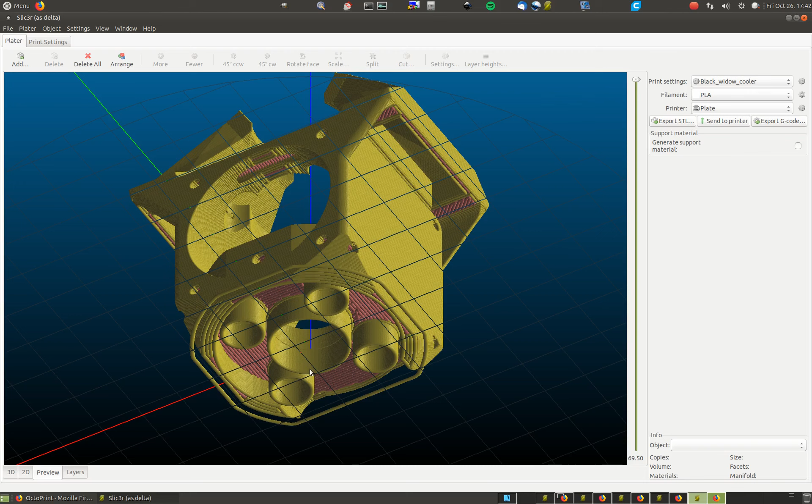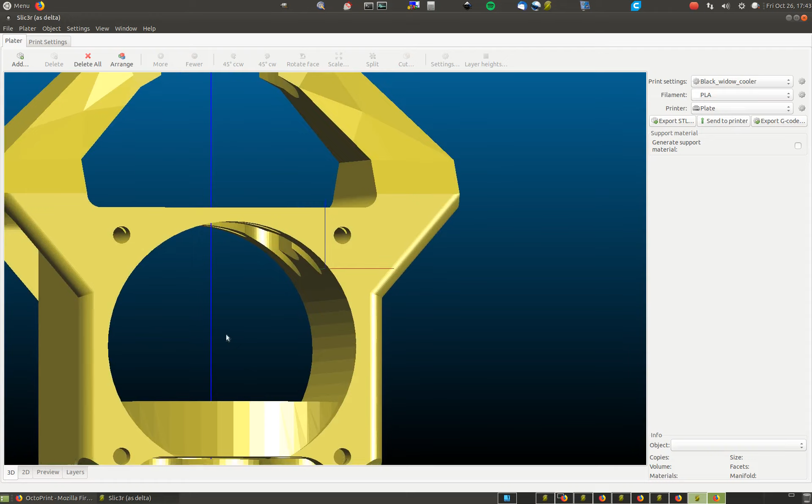I'll just go back to the 3D view. I've actually, in the design, put these supports. Now if I get the right angle here, we might be able to see the gap. There's a tiny little bit of a gap in this neighbourhood here. Maybe you can pick that up. It's pretty hard to show.

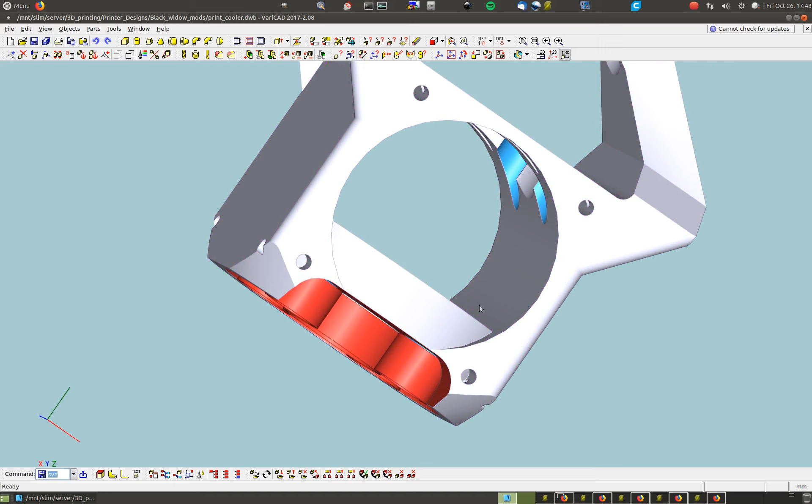Okay, I'll go to the 3D CAD program. There we go. So what I got here is there's a tiny gap, see a bit of blue space. Let's just see how much I can zoom in there. There you go, you can see that bit of space in this area here. That's 0.2 of a millimetre gap I've left there.

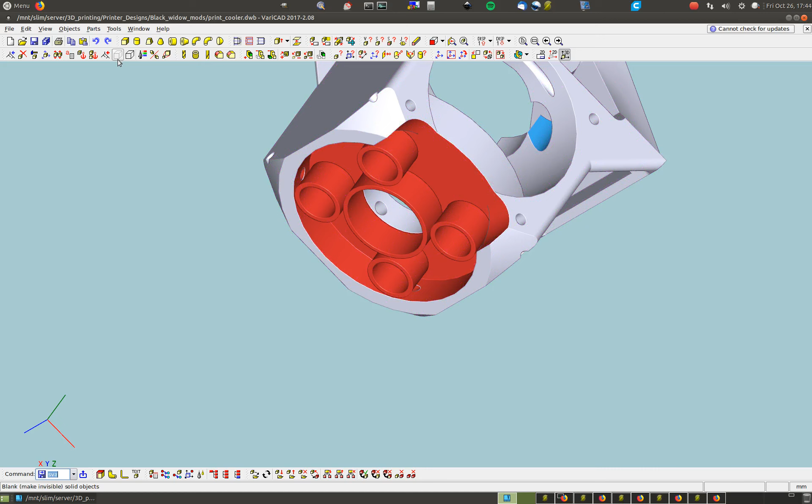Now I've decided to put the supports that I want into the design. The advantage of putting them into the design is if at a later date, six months later, you go to print this again, you won't forget the supports because they're built into the design. So you can come back, do the slicing, whatever, and there's a good chance you won't have any failures because of some silly thing you forgot. The supports are built in. I'll just make these invisible, make them disappear. So here's actually the design.

And you can see when we go to slice, there'd be an area. Change that view mode, it's rendering. There we go. When we go to slice, what the slicing packages do is create a couple of perimeter paths depending on your specifications. But I want 2 perimeters on this. I've got a 0.6mm tip doing the print, so it's able to do a pretty wide track.

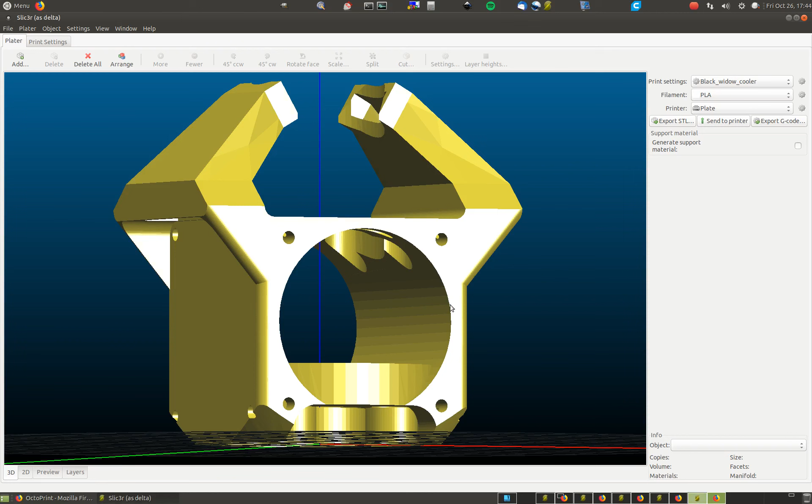And that's why I need the support to support basically 2 tracks, because it will do the track that's away from the surface, and then the fine surface track. So let's have a look at the slicer again so you can see what I'm talking about. Go back to the... okay, lift it up. Where are we? There we go.

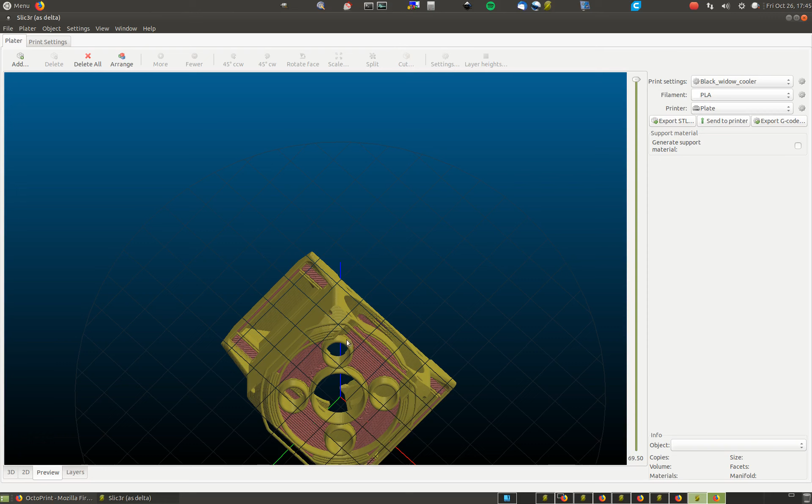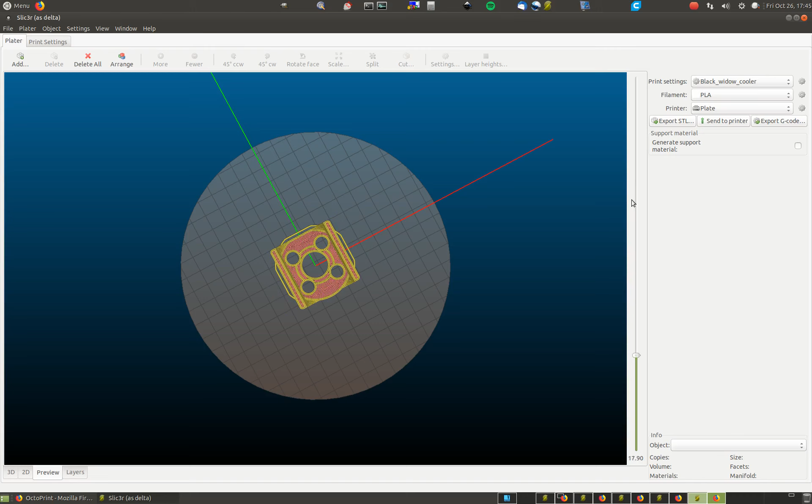So you can see there's the supports underneath, and there's actually another track that's partially supported. Maybe I'll look at it from above. Oops, other way - my CAD program and slicer zoom and pan the opposite way around, so my brain's always having to switch into reverse. So we just go down pretty low. Okay, so there's... you see the supports, I'll just zoom in. So there's our supports, done as very wide tracks.

And there's our first layer. You can see you've got 2 tracks here which land either edge of my support, and there's a 0.2mm clearance. So what you have is that should be partially supported but not really that well stuck. So these supports that I've designed should break away quite nicely.

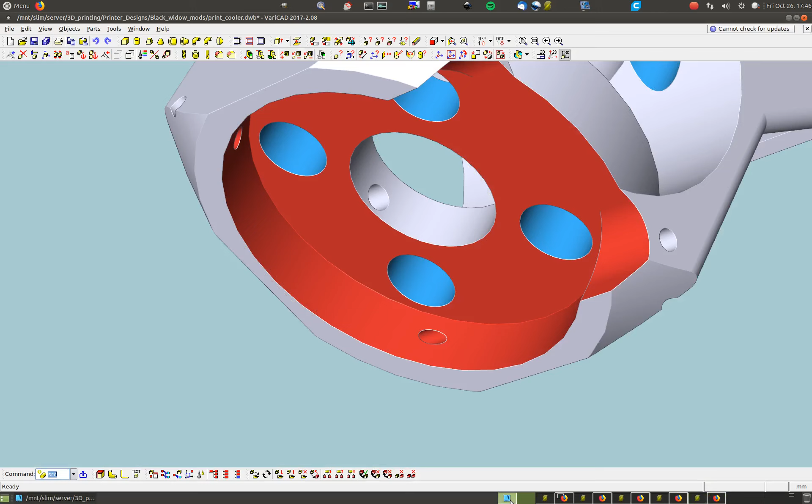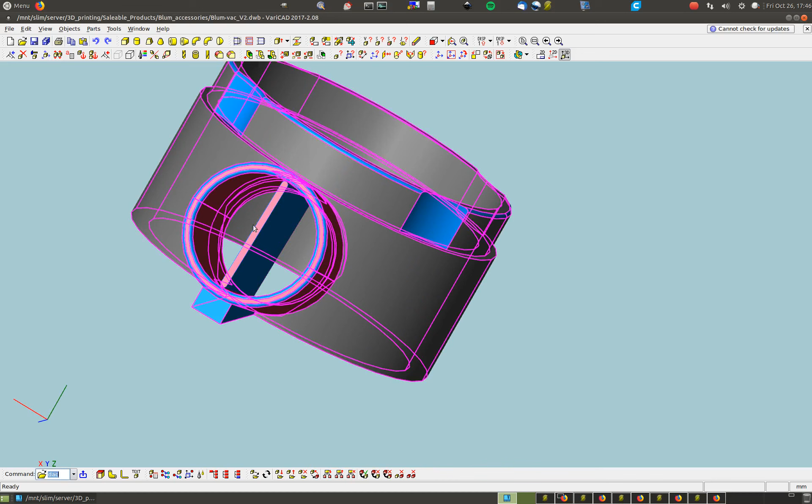I've done that on another design. Let me just... what's the best way of looking at that? Okay, I'll go into VariCAD, open Blum-vac, that should do it. Okay, so here's a built-in support as well, this rectangular piece. Again, I'll just get rid of the editing rendering. Go away. Now you can see there, if I zoom in close enough, there's actually that 0.2 of a millimeter clearance, and the same above.

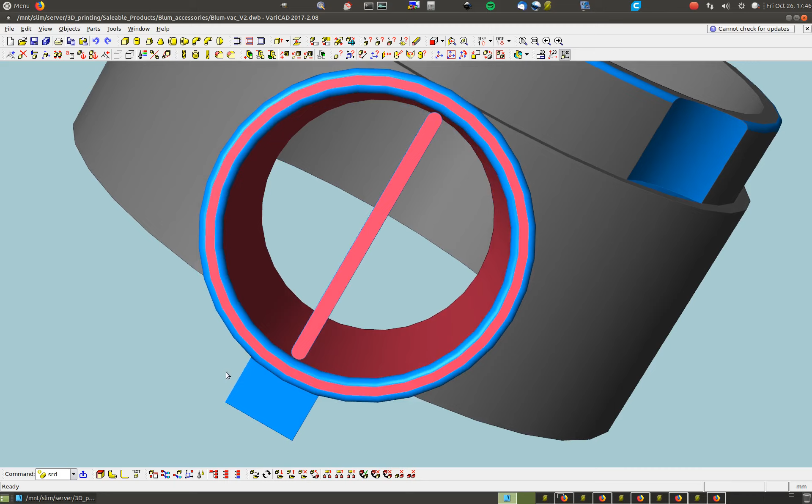So that's adequate for me to have a breakout support in that section. If I let the slicing packages do that, they end up supporting a lot more than necessary, and it makes it very difficult to manage. This support here is because on the printers that I've got very good print cooling, I don't need this particular support, but not all my printers are created equal. So for safety's sake, I put this block in, and it means the machines that don't have decent cooling will still print this part reliably.

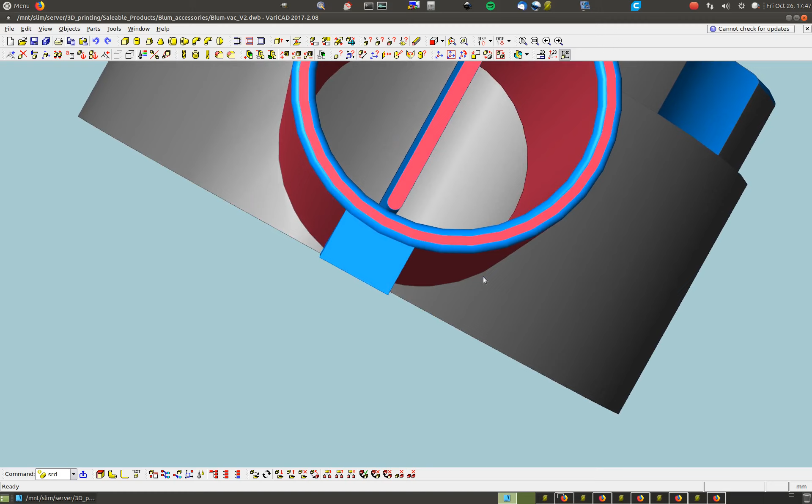So if I have to print quite a few of these things, I can use a number of printers to produce an identical part. You can see it's a simple part, except for this area here, which needs support. But this minimal amount of support is enough for any of my printers to print this part reliably. That's built into the design, so I can't forget it when in five months' time I want to print another batch of these. I won't forget myself, because the supports are actually in the design.

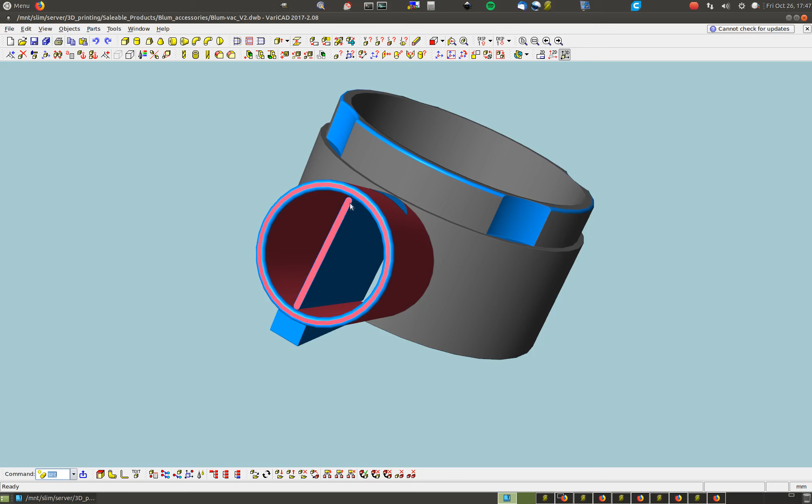So I hope that's of interest to you. I don't know how else to explain this other than what I've just done. But using the slicing package to generate supports is not as desirable as having it built into the design. So a little bit of clever design - you can design in your supports and design in exactly how well you want them to break away by simply understanding what it is you're doing.